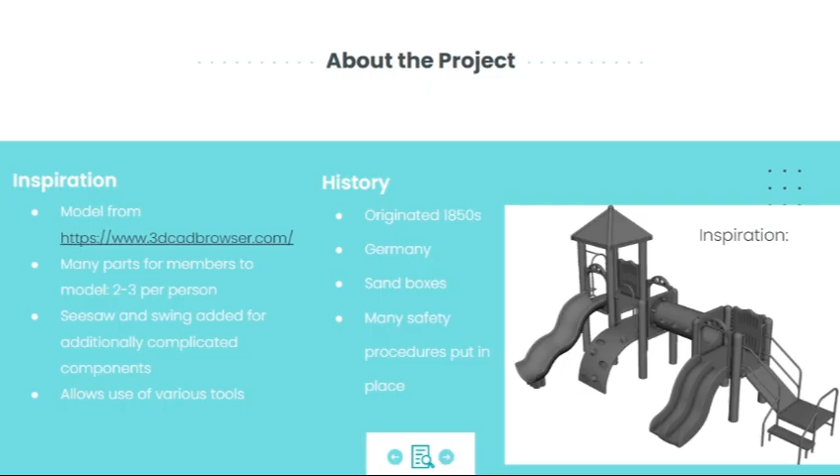During this project, I was responsible for designing the most technically complex feature in the entire assembly. The platform of the playground required an advanced combination of SolidWorks tools, and building it pushed my modeling skills to a new level. In total, the feature incorporated 18 boss extrusions, each one carefully dimensioned to create the structural thickness and geometry needed for stability.

To support these extrusions, I created 19 different reference planes, allowing me to control angles, offsets, and alignment with precision that wouldn't have been possible using the default planes alone.

To shape the railing and post elements of the platform, I used 10 sweep features. These sweeps, along with the fillet tool, were essential for forming the rounded edges and connecting surfaces that give the playground its finished, professional appearance.

Additionally, I incorporated 7 cut extrusions, which allowed me to remove material strategically for openings, slots, and safety-related clearances. Beyond the platform, I designed the roof structure using the loft feature to blend multiple profiles into a single continuous form. This gave the roof a clean, aerodynamic shape that complements the rest of the playground's design.

When I moved into the assembly stage, I evaluated the model from a functional and safety perspective. As I examined the structure, I realized that certain areas of the playground appeared exposed and could pose a risk to users. Because of this, I made the decision to design an additional wall and barrier system, again using boss extrusions and cut features, to create a protective boundary.

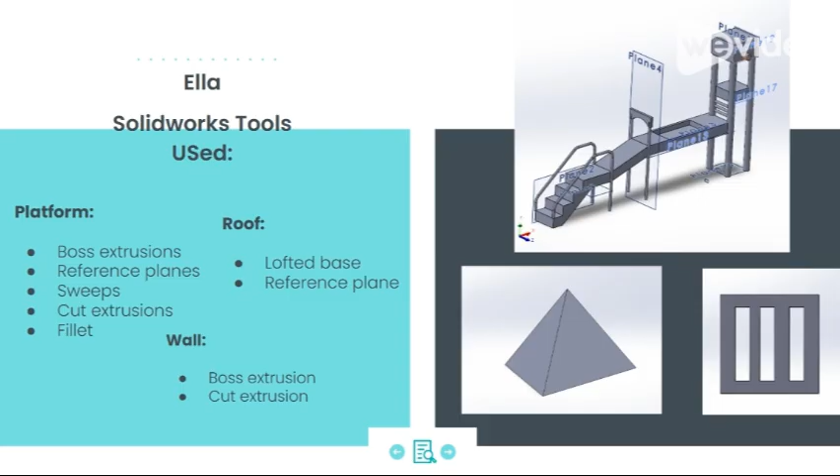This addition not only improved the overall safety of the playground, but also enhanced the visual completeness of the final assembly. The platform serves as a central access point within the playground, designed to allow children to climb up and reach the surrounding amenities such as the slides, the tunnel, and the monkey bars created by my groupmates.

Because it functions as the main transition area between multiple play features, its dimensions had to be extremely precise. Achieving this accuracy required several iterations of the model. Each trial involved adjusting heights, clearances, and connection points until the geometry aligned perfectly with the rest of the assembly.

Ensuring that the platform was exactly the right size was essential not only for functionality, but also for maintaining proper alignment with the attached components. Above the structure, the roof plays an important visual and structural role. As the tallest element in the playground, it acts as a unifying feature that ties the entire design together.

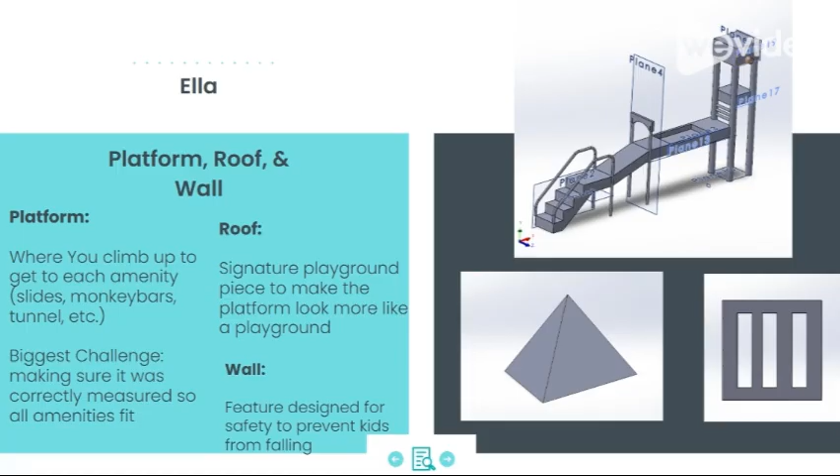Its elevated position gives the playground a clear focal point, and its shape reflects the style commonly seen in real-world playgrounds. By incorporating this roof, the model gains both realism and architectural coherence, helping the entire assembly feel complete and intentionally designed. So I worked on the slides.

For the first slide, I basically used a U-shaped cross-section. I only needed a U for this one just because this is a one-person slide. I then was able to use spline to create multiple bumps, and this is the larger of the two. It's actually slightly taller, but it's the same width.

The biggest challenge for the first slide was that the initial sketch would not register as one structure to sweep. It kept saying there was some type of gap, so I kind of just had to go in, fix all the dimensions, and yeah.

For the second slide, it's a W-shaped cross-section, because it's a two-person slide, similar procedure to make it. I used spline for the path. The biggest challenge for this was I actually did it first, so the actual general procedure needed to be developed. Originally I didn't even really know how to approach making a slide, but I was able to work through it.

For the features I used for both of these slides, I used the sketch for the cross sections, and then I mirrored it so it's even on both sides. Then I would use spline to construct the path of the slide, and a sweep to make a shell of the slide guided by the spline. So the steps to make it, just quickly recapping everything I've said: I sketched the cross section, mirrored over the y-axis, used spline for the slide path, and then just a general sweep for the slide structure. That's how I constructed both of the slides.

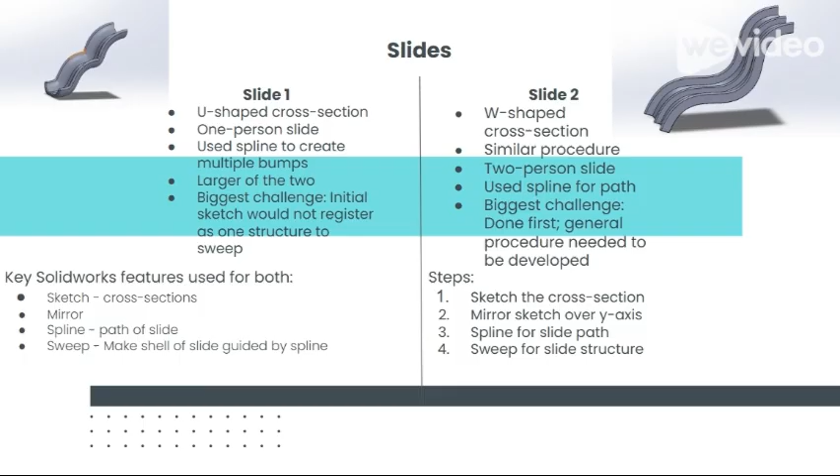For my contribution to the project, I designed and modeled two main playground components in SolidWorks, a climbing wall and monkey bars. For the climbing wall, I focused on creating a realistic structural design that would function as part of a playground system. I built the main frame using extruded features and used cut features to shape details of the structure, such as the cutouts on the wall used to climb on.

I also applied fillets to smooth edges and make the geometry more realistic, and used patterns where needed to keep spacing consistent for the climbing holes.

For the monkey bars, I designed a structure made up of 4 poles and 2 side supports connected by evenly spaced horizontal bars. I used extrusions to create the main shapes, and again used patterning and sketch tools to maintain the equal spacing and symmetry between the horizontal bars. Fillets were also used to refine edges and improve realism. The goal was to make sure the structure was both accurate and visually consistent with real playground equipment.

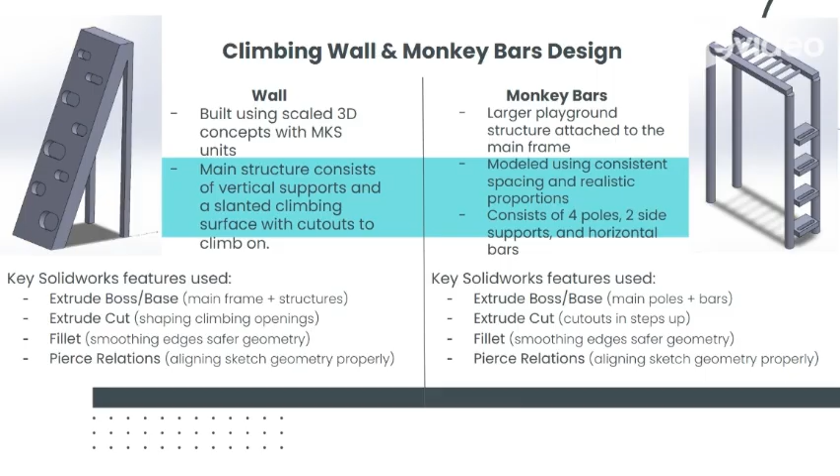Overall, both parts were designed with proper scale, structural balance, and SolidWorks features to ensure they would integrate smoothly into the fully assembled playground. For my part of the project, I made a swing stand and the swing seat.

I chose these parts because they're an important part of the playground, and they also help me practice building both fixed and connected parts in SolidWorks. I first worked on the swing stand. This is the main frame that holds the swing up. It has 2 side supports and the top bar that connects them.

While designing it, I had to make sure all the pieces were lined up correctly so the structure would be strong and fit properly with the rest of the playground. I also had to think about the spacing so the swing could hang in the right position.

To build the stand, I started with simple sketches to draw the basic shapes and measurements. After that, I used extruded base to extrude those sketches into 3D solid parts. This helped me create the main frame step by step. I also used extruded cut to make the holes and remove material where the swing would connect. These tools made it easier to build the structure clearly and in an organized way.

After finishing the stand, I moved on to the swing seat. This is the part where someone would be able to sit. I made it simple but mostly realistic in size so it would match the stand. I ended up using sketching and extrusion again to build the shape.

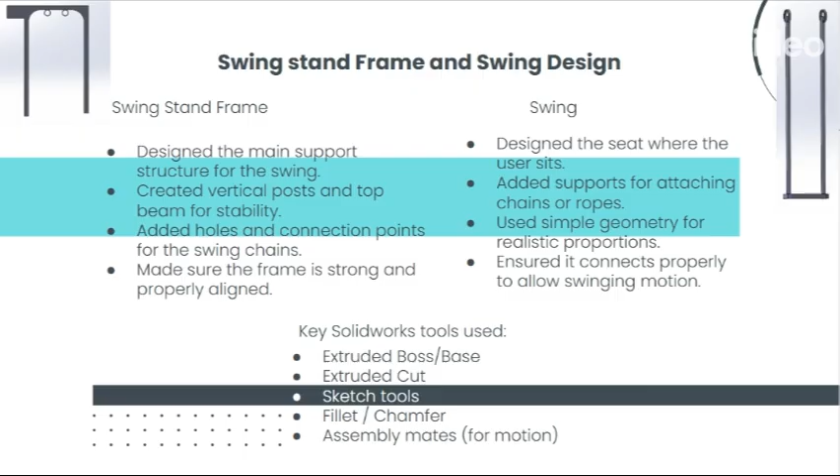Okay, so for my part of the project, I started by creating a sketch on the front plane using a circle to make the main shape of the tunnel. Then I used the extruded boss/base feature to extend the sketch into a cylindrical body. After that, I used the extruded cut feature to hollow out the inside of the cylinder and give the tunnel a realistic wall thickness.

Next, I created rectangular side plates on each end by sketching rectangles and then extruding them outward. Then I added circular holes along the side of the tunnel using the extruded cut feature and spaced them out evenly for symmetry.

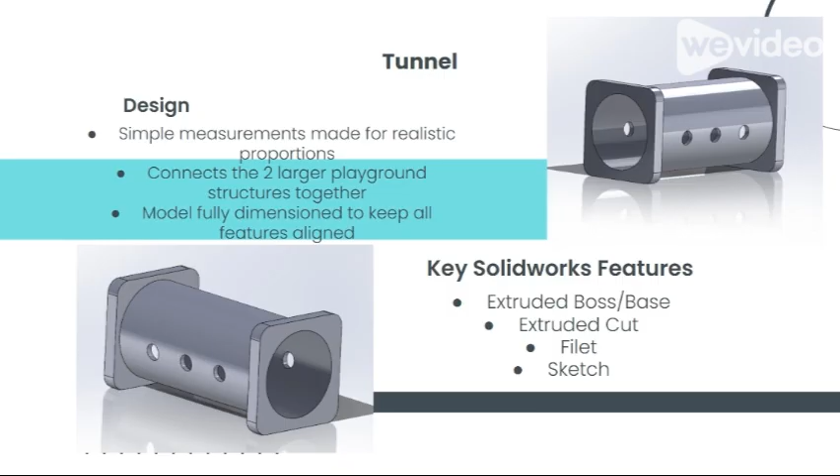Then I applied fillets to the edges to smooth out the sharp corners and improve the overall appearance. Throughout the design process, I used dimensions and constraints to keep the model fully defined and proportional.

To make the seesaw, I first started by designing the base and the triangular support structure using 2D sketches and the extruded boss/base feature. These supports act as the foundation and hold the main beam in place.

After that, I created the main seesaw beam by sketching a long rectangle and extruding it into a solid bar. I then added a center hole in the beam so it could connect to the pivot point and rotate properly. Next, I modeled the seats and handles on both sides of the seesaw using simple sketches and extrusions.

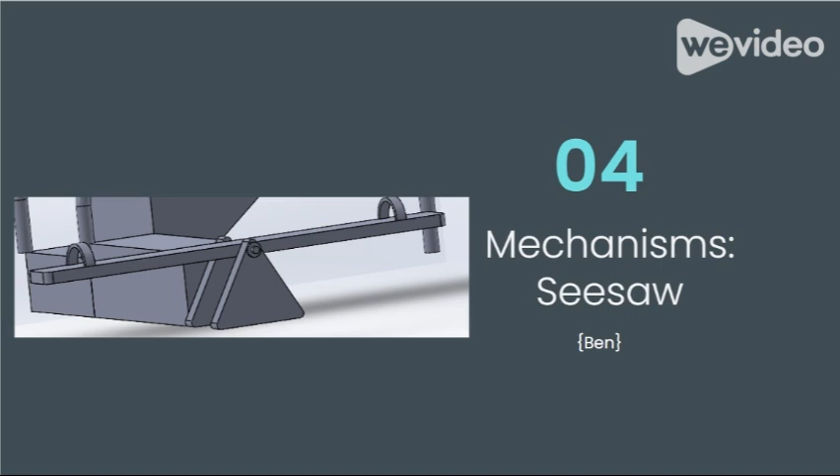I made sure the dimensions on both ends were symmetrical so the design would stay balanced. After creating the main parts, I applied fillets to smooth the sharp edges, giving the model a cleaner and more realistic appearance.

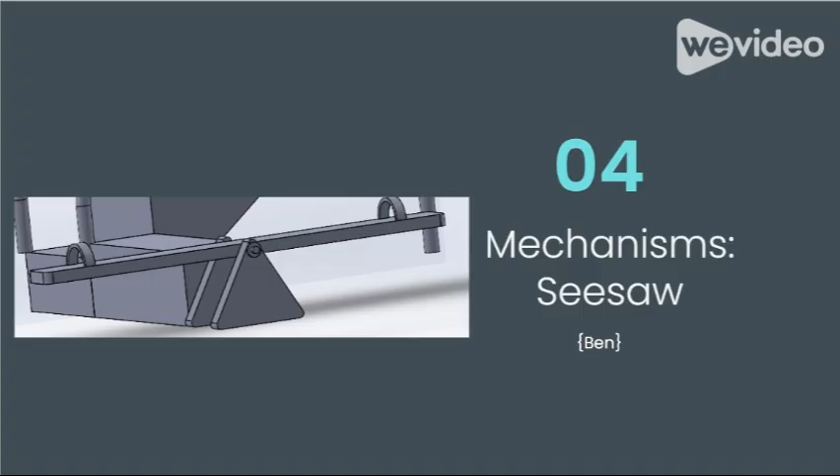Finally, I assembled all the components together using mates such as concentric and coincident mates to properly align the beam and pivot connection, allowing the seesaw to realistically move around the center support. Overall, this project improved my understanding of how mechanical parts fit together and helped me develop stronger SolidWorks modeling and assembly skills.

For the assembly stage of our project, my role was to take every individual part created by my group members and bring them together into one fully functioning playground model. This step required careful alignment, consistent mate selection, and a strong understanding of how each component interacted with the others.

To ensure the structure came together accurately, I applied a total of 36 coincident mates, 4 concentric mates, 2 lock mates, and 4 tangent mates. Each mate played a specific role in controlling movement, constraining geometry, and guaranteeing that every part fit exactly where it belonged.

As I assembled the structure, I made sure that every platform, slide, tunnel, roof piece, and support feature connected exactly as intended. Using this combination of mates allowed me to verify that all dimensions, clearances, and reference points were consistent along the entire group's work.

It also revealed how each part contributed to the overall design and how small adjustments in one component affected the rest of the assembly. The assembly process also helped us identify areas that needed improvement, such as stability, spacing, and safety.

By viewing the playground as a complete system rather than isolated parts, I was able to make informed decisions about additional features, including the safety barrier I later designed.

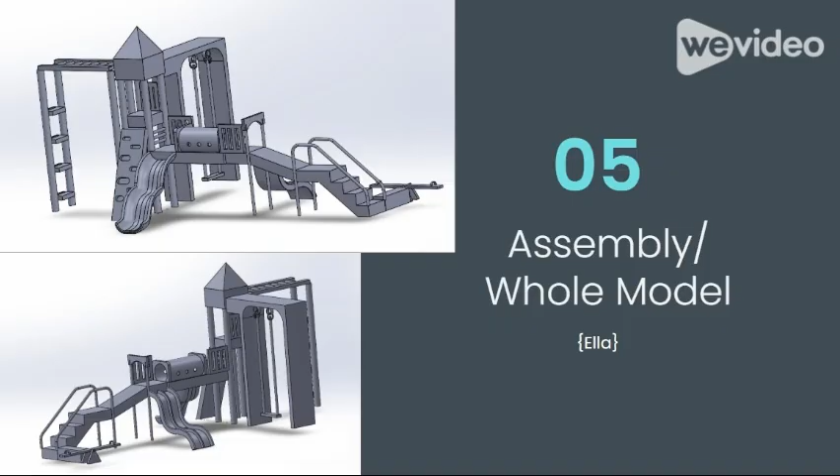Overall, the assembly phase transformed our individual contributions into a cohesive, realistic playground model and demonstrated how collaborative design comes together in SolidWorks. For this slide, I want to explain our overall design approach and how we kept everything consistent across the group.

Since we didn't create separate 2D engineering drawings, we designed the entire playground directly in SolidWorks using a dimension-based CAD approach. One of the most important parts of this process was establishing accurate, shared dimensions from the very beginning. I actually started by taking an online playground model and adding all the key dimensions to it: height, width, platform levels, slide lengths, and spacing between features.

These dimensions became the reference for the entire group. Everyone used the same measurements to model their individual parts, which meant all components were built to the same scale and would fit together correctly in the final assembly.

I also want to add that we used the units MKS in SolidWorks. This step was huge for communication. Instead of everyone guessing or interpreting the size differently, we all worked from one unified dimension set. It made collaboration smoother, reduced errors, and ensured that we brought all the parts together, aligned exactly the way they were supposed to.

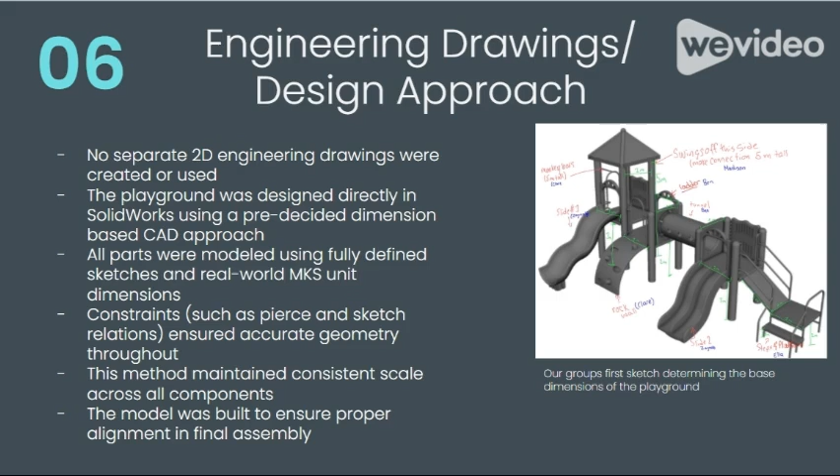Overall, this approach helped us maintain accuracy, consistency, and teamwork throughout the project.

Throughout this project, the true sparkle of our work came from the complexity of the design and the collaboration required to bring every component together into one cohesive playground assembly. My group and I each contributed unique parts, but the real achievement was seeing how those parts interacted, aligned, and supported one another once assembled.

The precision required in mating features, adjusting clearances, and ensuring structural consistency highlighted how much engineering depends on teamwork and communication. If I had more time, I would have pushed the platform design even further.

I originally envisioned a more intricate structure with additional contours and interactive elements, but balancing this project with studying for exams and preparing for finals meant I had to prioritize accuracy and functionality over added complexity. Given those constraints, this represents the strongest and most focused work I could produce, and I'm proud of the final result.

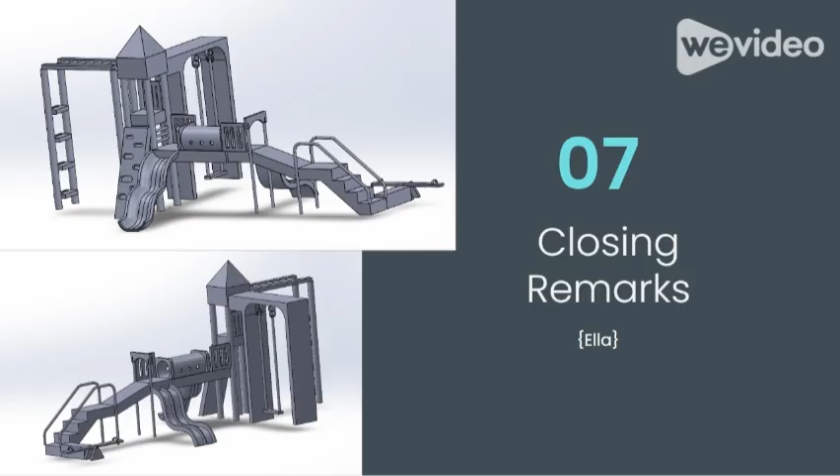Overall, this project was a valuable learning experience that strengthened my technical skills, my problem-solving abilities, and my confidence in using SolidWorks to bring a complex idea to life.